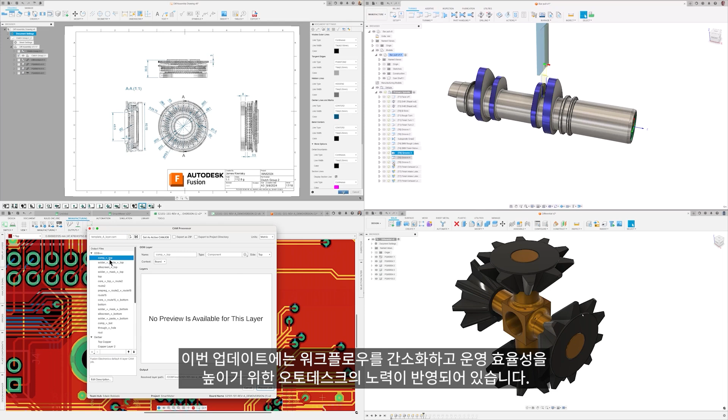Our development team have been hard at work adding new features and functionality to aid in your design and manufacturing and CAM programming for turning processes. These updates reflect our commitment to streamlining workflows and increasing your operational efficiency. Let's start off this release with the manufacturing workspace.

This release brings a lot of value to those who do turning, with many enhancements and new features, as well as additions to geometry selection and additive, with an extremely useful bonus new feature for setups. Let's take a look.

To give you more flexibility and a more consistent experience, we have added another improvement to threading operations on turning toolpath, which is Z-axis confinement boundaries.

Previously, the confinement for a thread was on a per-thread basis and was confined to the stock, which resulted in trial and error to get the desired toolpath outcome.

We have now aligned the turning confinement options for threading with the other turning strategies, which allow you to be more purposeful as to where threading begins and ends.

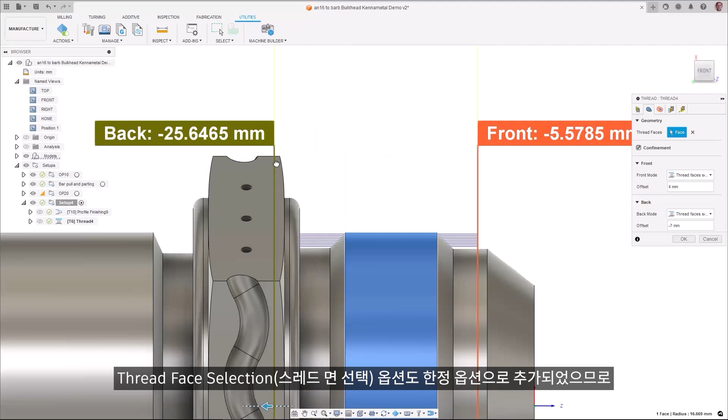Additionally, a thread face selection option was also added as a confinement option to make things simpler in situations where you have multiple threads to machine.

A highly requested improvement to threading operations in turning is the ability to define the depth of the first pass, and it's now available. This increases toolpath flexibility and safety.

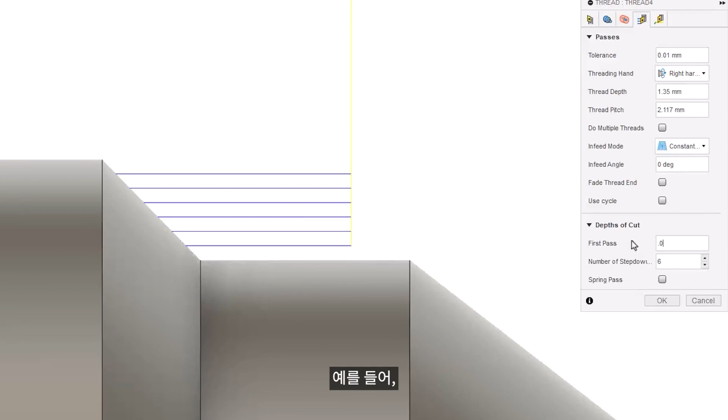For example, when threading harder materials where a larger than desired amount of material being removed on the first pass can damage the tool. An important callout here is that post-processes will need to be modified to populate the relevant Q value inside the threading cycle.

All the posts on the website have been modified to add this functionality, so you will need to use the updated version for the cycle to output correctly.

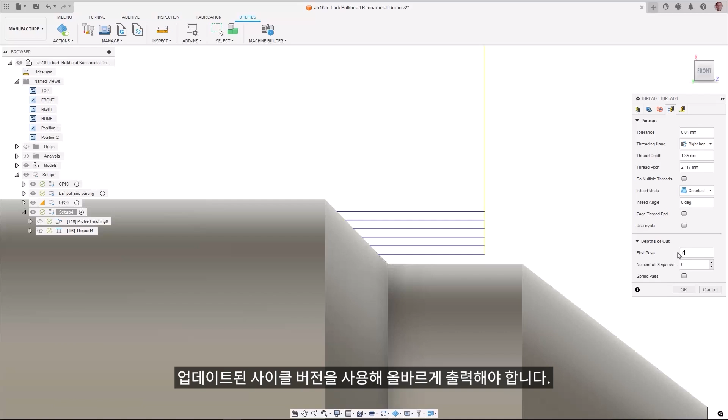If you want to finish profile grooves on the face of a turned part, it can be particularly difficult to understand the correct workflow when only given either the outside or the inside profiling option in the profile finishing strategy.

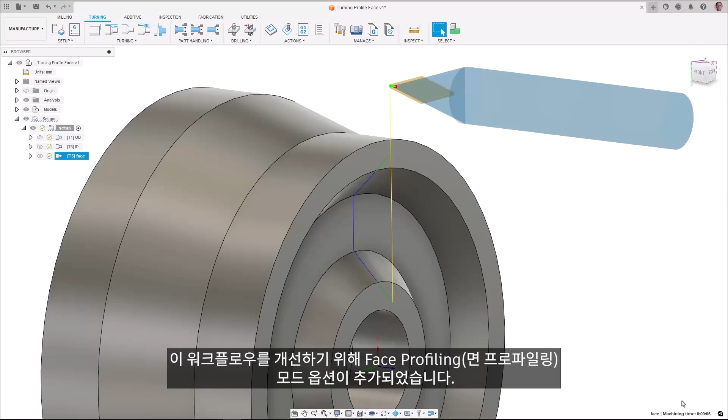To improve this workflow, we have now added the option of a face profiling mode, which creates a clearer workflow for you to ensure that the toolpath retracts correctly with the Z-axis first.

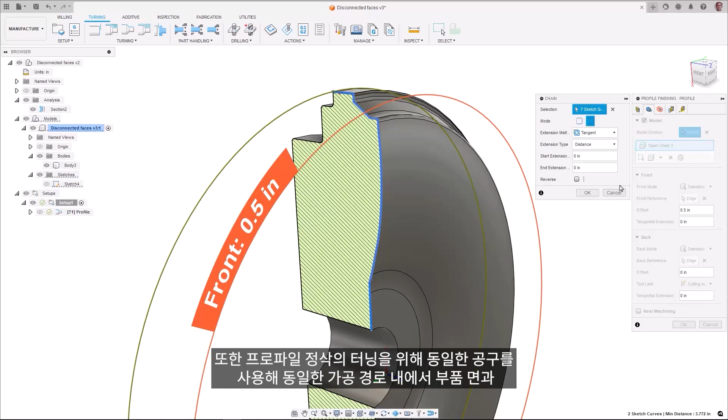Also, for turning in profile finishing, we have added the ability to machine multiple disconnected regions on the ID, OD, and the face of the part within the same toolpath, using the same tool.

This allows you to machine both face grooves on the part as well as features on the OD or ID of the part.

Bar pull functionality has been added in this release, and it's truly a big enhancement for turning. There are many reasons on a turn mill machine as to why you would want to use the sub spindle to pull the bar stock.

Maybe you have a long part that needs to be machined in steps to ensure maximum rigidity and support, or maybe you want to use the sub spindle to pull out the next part length before parting off.

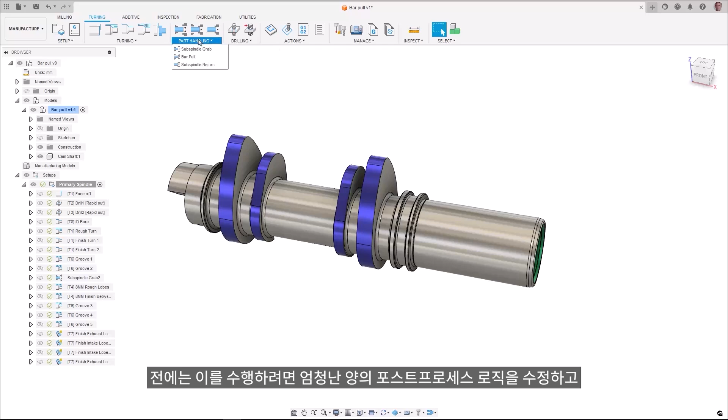In the past, this could only be achieved through a heavily modified amount of post-processor logic and manipulation of the sub-spindle return option.

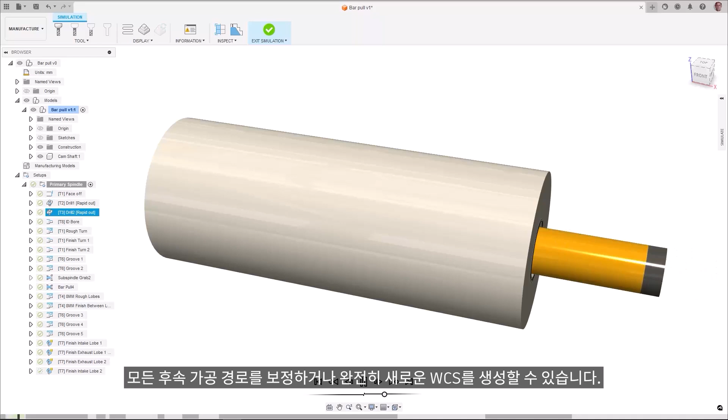You now have a designated bar pull option that enables you to define the pull distance of the part and gives the option to either compensate all subsequent toolpath or create a new WCS entirely. This gives you more clarity through the turn mill workflow, enabling you to program quicker.

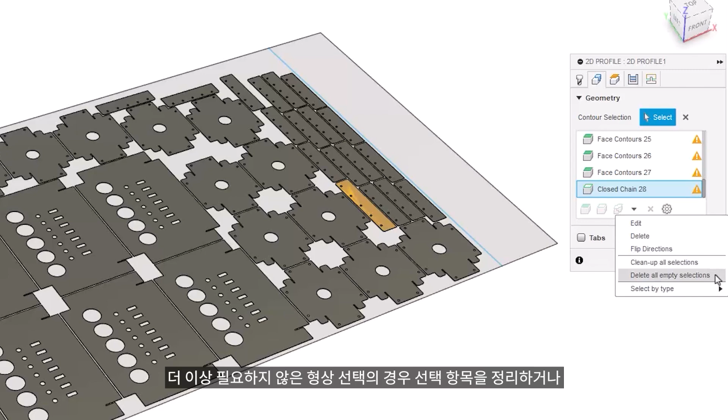Improvements to geometry selection allow you to remove redundant selections and references more quickly and easily. For geometry selections which are no longer required, there are new options to clean up selection or clean up all selections, which will remove empty geometry selections.

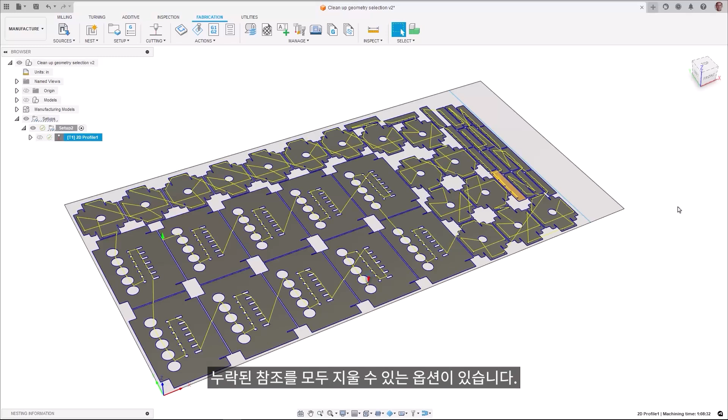For geometry selections which are still required but need rework, for example reusing a chain selection to select a different feature, there are options to clear missing references and clear all missing references.

For those of you who leverage the Wrap toolpath functionality, we have made it substantially easier for you to make pocket selections. Prior to this release, all pockets needed to be selected individually.

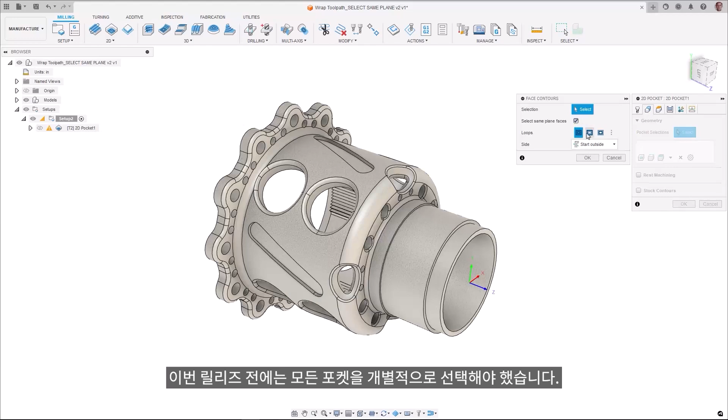Of course, if you had just a couple pockets to select, this wasn't a big issue. However, if you had dozens of pockets, it tended to get rather laborious.

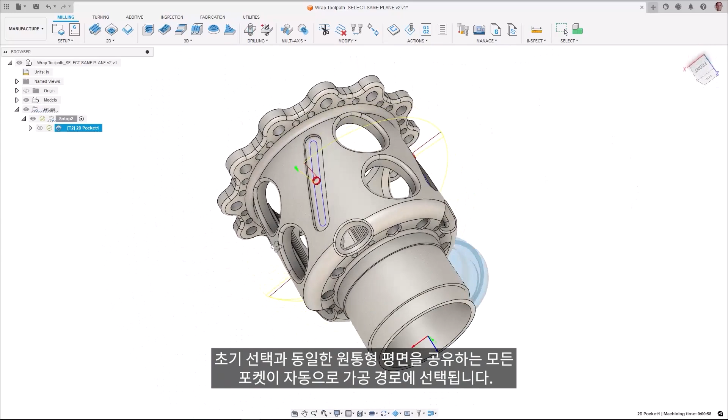We have now introduced the Select Same Plane option for pocket selection. Once you enable this parameter, the toolpath will automatically select all pockets that share the same cylindrical plane with your initial selection.

Have you ever wondered if your part will actually fit in the machine, or wondered if it was positioned correctly so you could machine a feature without exceeding the axis limit? With a new option in the setup, you now can.

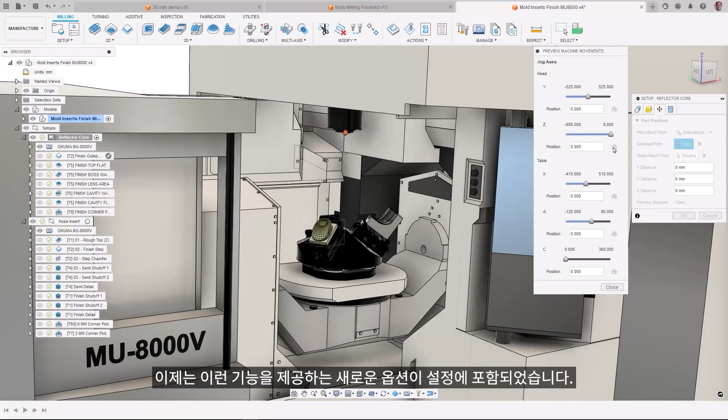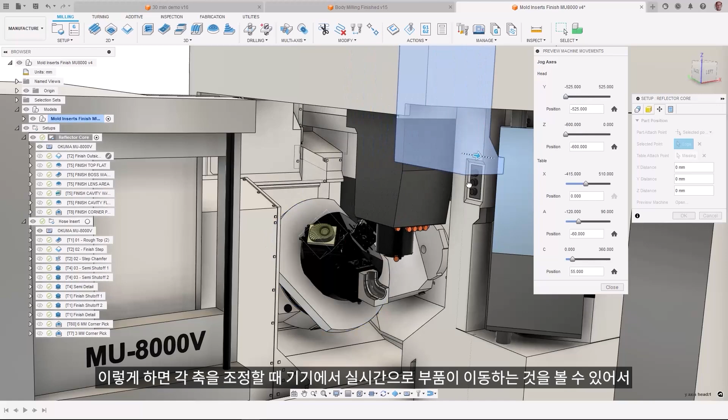In the Part Positioning tab of the setup, there is a new button called Preview Machine. This will open machine jogging and allow you to jog the machine via drag handles or by selecting the bodies themselves. This gives you the benefit of seeing your part move in real time on the machine when you jog each axis.

The Inspect Surface Probing provides the ability to inspect geometry with a user-defined probed path.

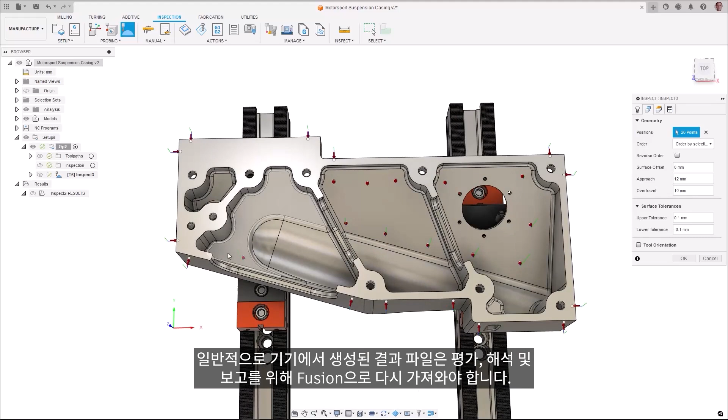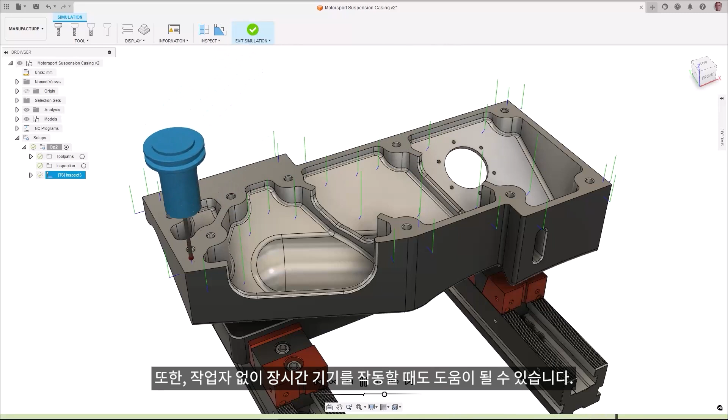The machine-generated result file typically must be imported back into Fusion for evaluation, analysis, and reporting. The new Live Data connection allows the machine-generated results to be sent automatically to Fusion, allowing results to be evaluated and analyzed more quickly, and provides additional capability to stop the machine if a problem is detected. This can also help allow machines to run without operator attention for longer periods.

Along with this release, we've provided machine connectors to support Fanuc, Heidenhain with DCOM, and Siemens with RPC controls. These can be found in Fusion Post-Processor Library for supported inspect and inspection post-processors.

A point connection net option has been added in additive as a new pattern type to bar support base plates for groups of connections. This allows you to generate base plates where every bar is connected to another bar, ensuring stability at the build plate without wasting material.

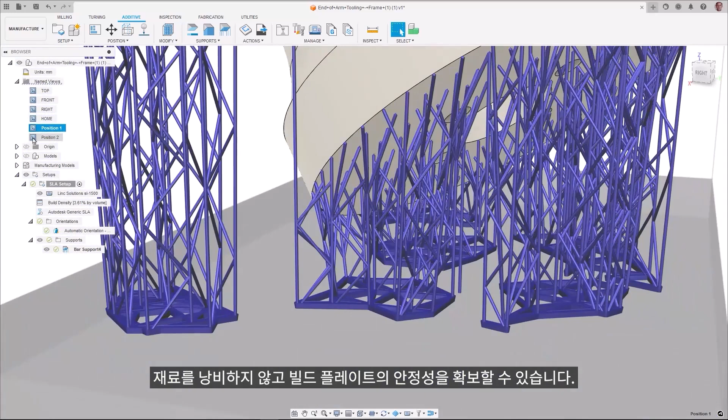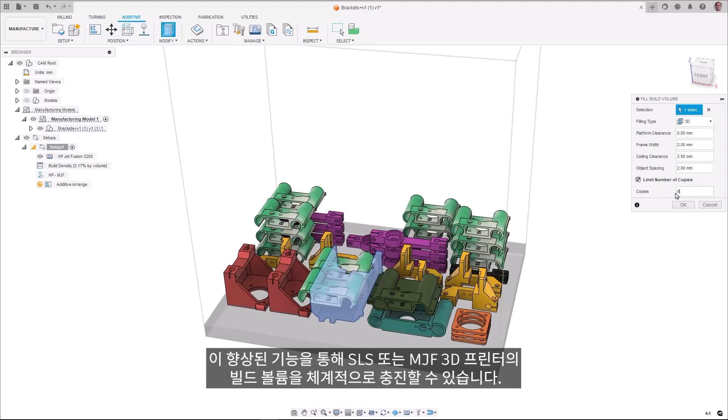When using the Fill Build Volume command, instead of filling the entire empty build volume with a selected component, users now have an option to limit the number of copies that will be created and limit which component actually gets copied. This improvement will also allow users to fill the build volume of an SLS or MJF 3D printer systematically.

I'm thrilled to inform you that Fusion electronic design capabilities continuously improve performance and usability, exceeding expectations. In this update, we're expanding our simulation features, refining library management, and much more.

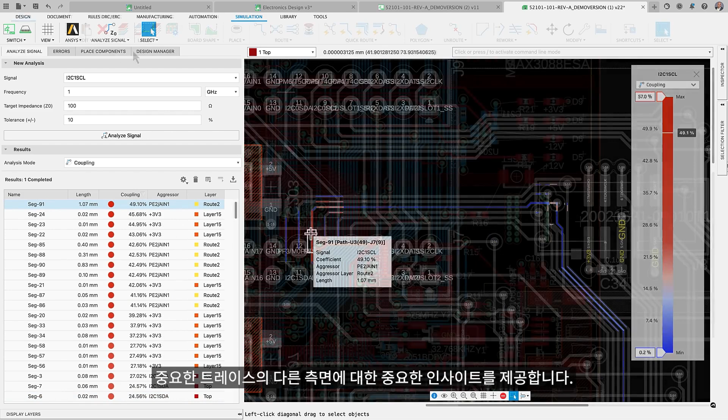Let's get started. Through our ongoing partnership with ANSYS, the signal integrity extension of Autodesk Fusion is continuously enhancing its capabilities. This powerful tool now offers you critical insights into impedance, resistance, inductance, capacitance, and other aspects of your critical traces.

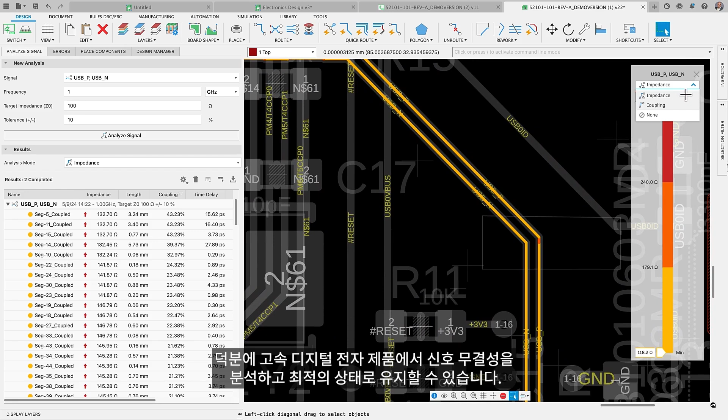Our latest update empowers you to more precisely analyze the coupling effects between traces and nearby aggressors. We have harnessed the ANSYS MOM solver for this update to ensure consistent impedance and coupling analysis on differential pair signals. This means you can analyze and maintain optimal signal integrity in high-speed digital electronics, which is crucial for minimizing performance impacts caused by even the slightest discrepancies.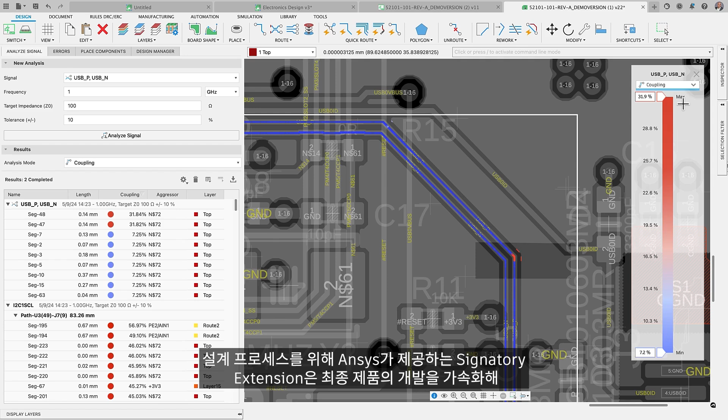Switching to the coupling mode will measure the pair's coupling coefficient against aggressor signals, a critical factor in understanding and mitigating crosstalk effects. Having the signal integrity extension powered by ANSYS as part of your design process accelerates the development of your final product, leading to enhanced outcomes and quicker market entry.

In our electronic workspace, we frequently define groups of assets for efficient design replication. When working with connected assets, typically, signal names are automatically updated. However...

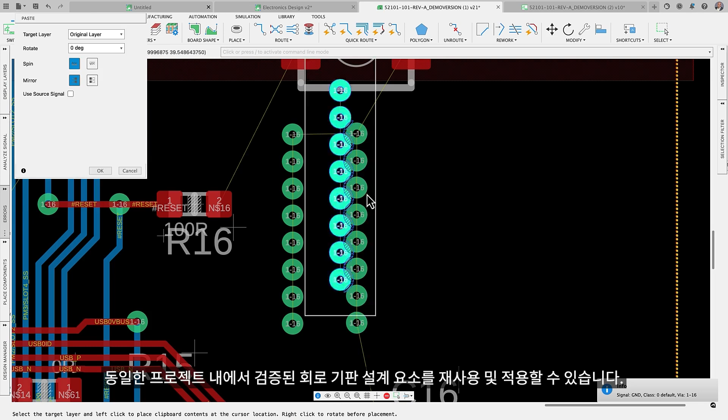With the latest version of Fusion, you now have the flexibility to either preserve the original signal name or opt for sequential signal naming. This enhancement facilitates your design process, allowing you to reuse and apply proven circuit board design elements within the same project.

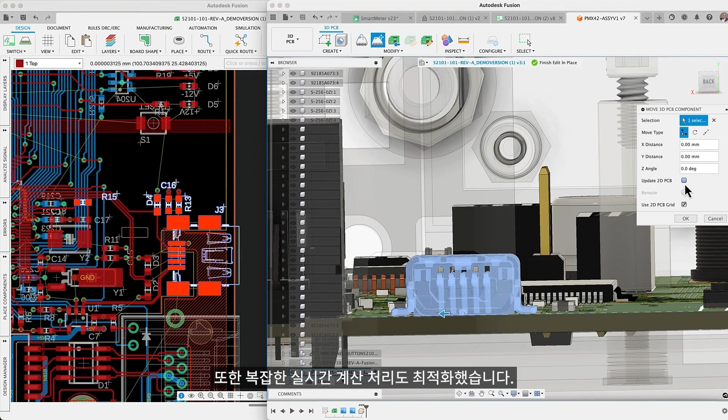We have implemented more Fusion Electronic updates to enhance your design experience. Our latest improvements speed up design loading, especially for designs containing large amounts of polygons. And we also optimize handling of the real-time rat's nest calculations.

Loading circuit boards will also load faster into the CAM processor for a smoother and faster path to manufacturing experts. These enhancements will accelerate your workflow and bring your innovative ideas to life more efficiently.

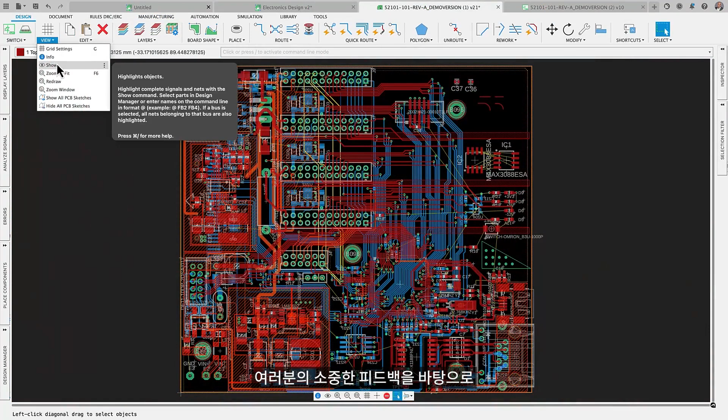We're pleased to inform you that based on your valuable feedback, we've reintroduced the show command and improved component selection with disabled top and bottom layers. Additionally, wires with flat caps are now accurately recognized by polygons for precise shape rendering.

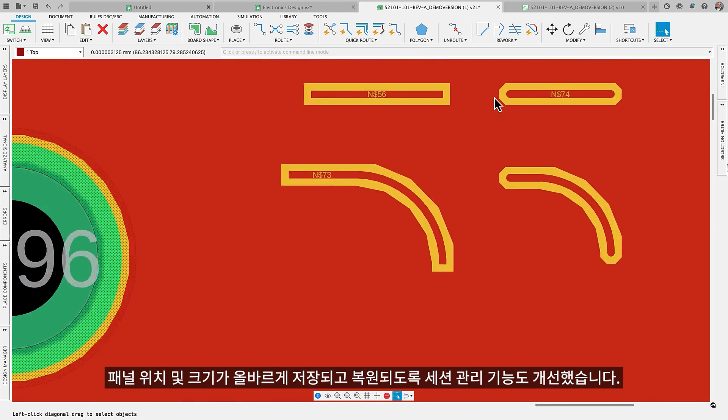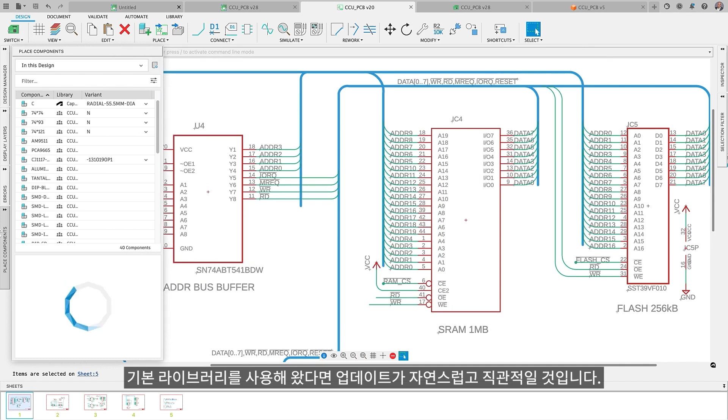We've also enhanced session management, ensuring that panel positions and sizes are correctly saved and restored. A significant change is our transition from local to library.io for Autodesk default libraries, which improves management. We also made it easier to identify our team libraries. If you've used our default libraries, updating is seamless and quite intuitive.

These updates will enhance your design experience and pave the way for future advancements. By streamlining the development process, they help accelerate your product market entry and reduce the need of multiple prototypes, saving you time and resources.

To start off the design space, we're introducing Ground to Parent to make your assembly workflows a whole lot smoother. It automatically grounds the component you create or add to the document, fixing the age-old issue where a component wouldn't ground immediately if it was placed first.

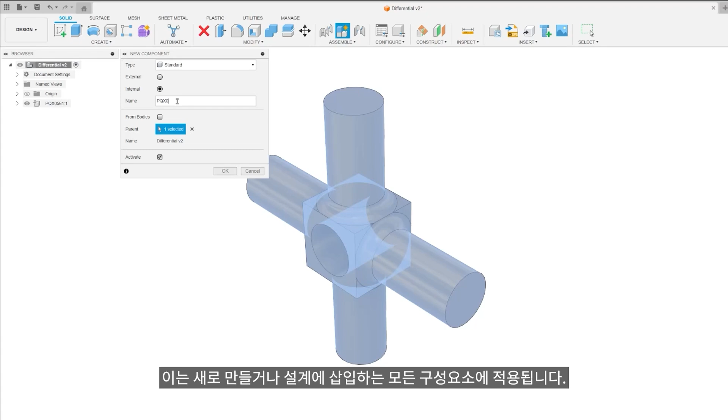By default, the first component, whether it's under the root or another component, gets grounded to parent. And this works for all components, whether they're created new or inserted into your design.

Here's a key point though: Ground to Parent isn't tied to the timeline. This means even if you move components around in the timeline, they'll stay grounded to where they were first inserted.

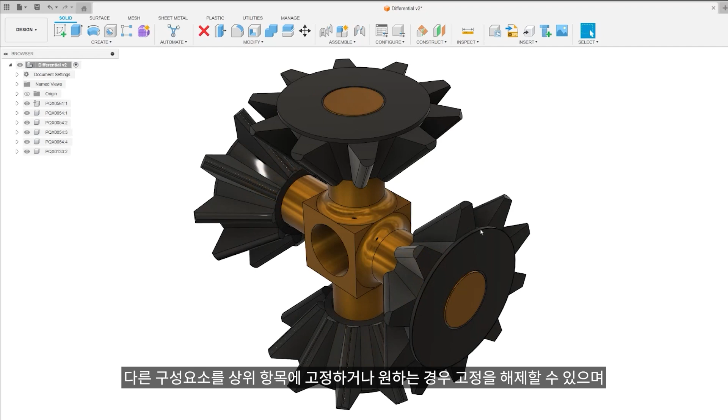But hey, you're still in control. You can choose to ground other components to the parent or even unground them if you want, all done through the browser. And just a heads up, we've renamed the original ground to a new name, Pin.

Solid Sweep is a game changer for creating complex geometries in a snap. Rather than using a sketch profile, you can now create a sweep using a solid body. You can create either a 2D or a 3D sketch to act as the path, and then select any body to sweep along the path.

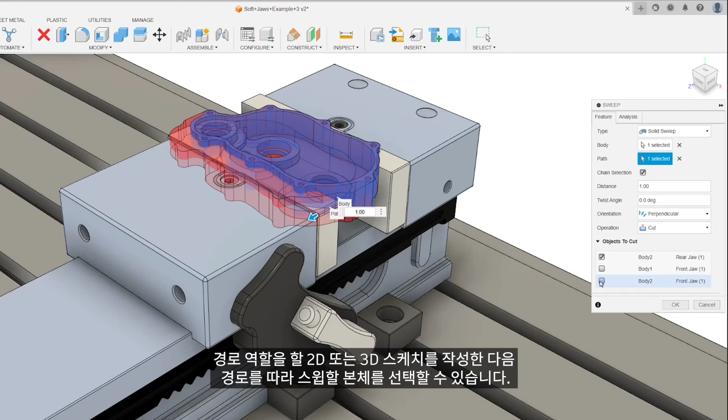New features like Solid Sweep are all about empowering you to innovate faster by allowing you to create complex designs more efficiently.

There is a new shell type in Fusion that introduces a robust and fast algorithm that creates rounded geometries instead of sharp edges. It also provides a partial success option when the geometry gets too complex, leaving you with surface bodies that you can manually patch.

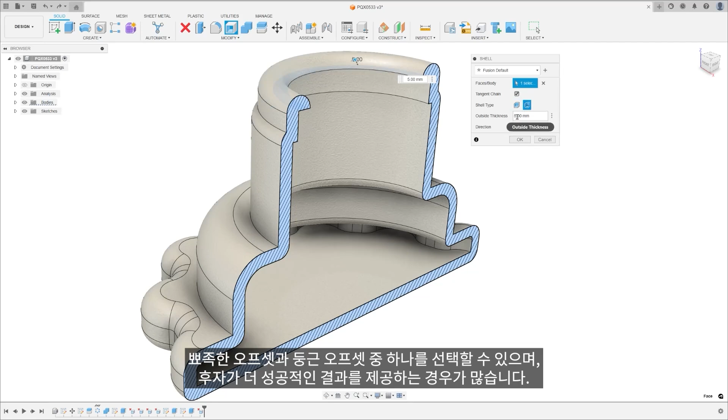You can choose between sharp or round offsets, with the latter often bringing more successful outcomes. If a shell fails, you'll get a suggestion to try a different type. This feature aims to reduce reworking outcomes to help boost your creativity.

The multi-hole patch tool lets you apply multiple patches at once to a single surface, all in one go. Not only does this save you a bunch of time, it also keeps your timeline neat and tidy. Before this, applying multiple surface patches to the same surface would require you to have separate operations, which could create

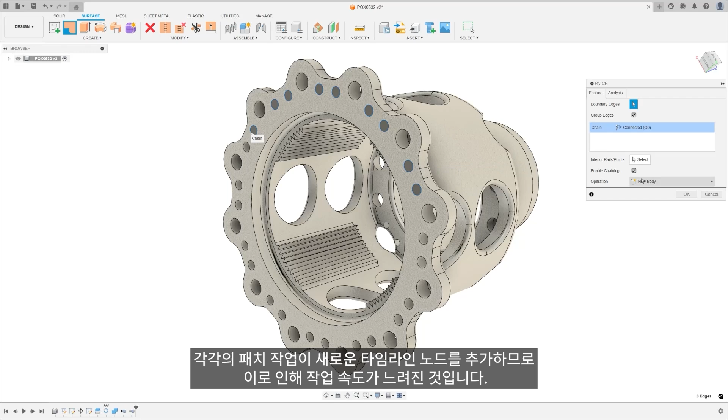quite a bit of timeline clutter, especially for faces with lots of holes. Each patch operation added a new timeline node, which could really slow things down.

Let's talk about measuring joint origins. This handy addition makes joint origin selectable when using Measure, which can be a real asset in various assembly workflows.

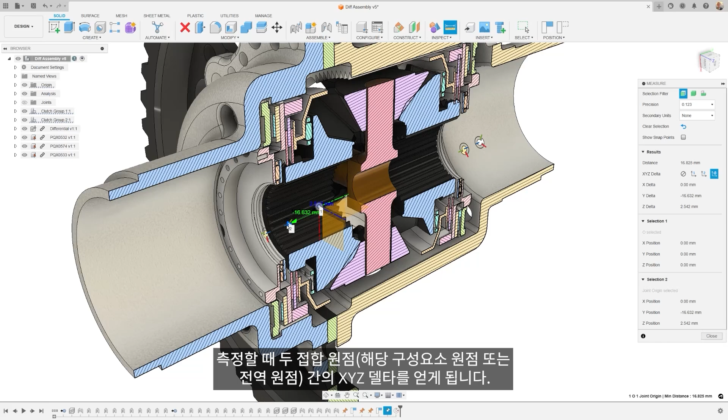In essence, joint origins are now treated the same way as points were previously. You can measure from one joint origin to another, or from a joint origin to any other measurable object. When measuring, you get the XYZ delta between two joint origins, either their component origins or the global origin.

Read-only configurations, this is a game changer. Before this, consumption of read-only configuration data was blocked, which could cause issues with insert, derives, drawing creation, or get latest. But now, you can share read-only configurable data downstream or with consumption-only datasets.

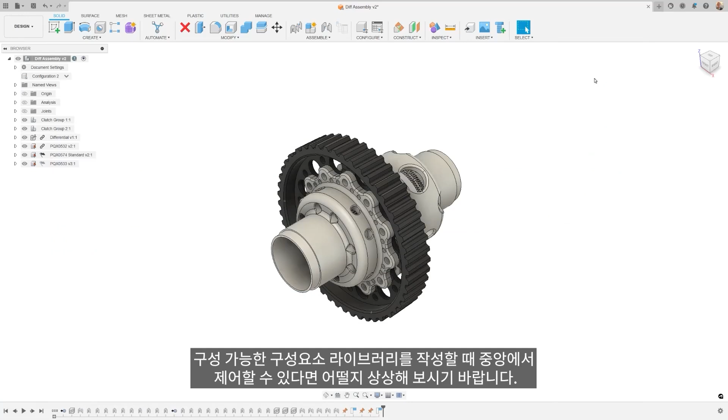Think of creating configurable component libraries with centralized control. It simplifies linking data up and downstream while maintaining a single source of truth. If you make a change somewhere, it's reflected everywhere. Also, it's fully integrated with Manage Extension, allowing for component filtering, creating change orders, and more.

Dropping down a dimension, let's take a look at Drawings Workspace. We've got 3 updates to walk through here.

First, the Section View Full Line feature enhances your viewing options. This tool allows you to optionally create a section line that spans all points of your design, providing a more comprehensive view of your work.

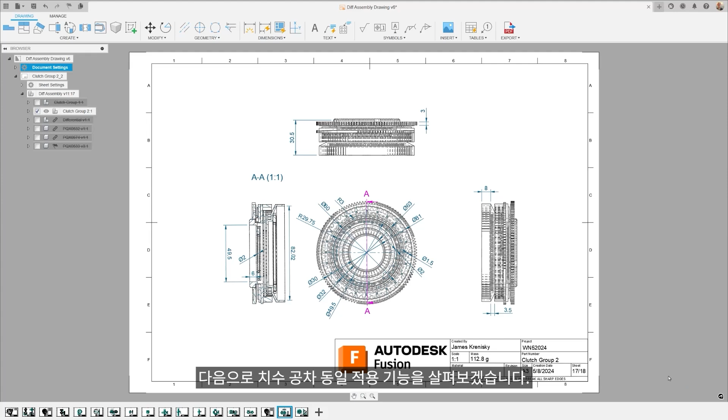Next, we have the Match Dimension feature. This is a time saver for those repetitive tasks where you need to copy tolerance, precision, and alternative units from a dimension to another. With just a click on a similar dimension type, you can apply the same tolerancing.

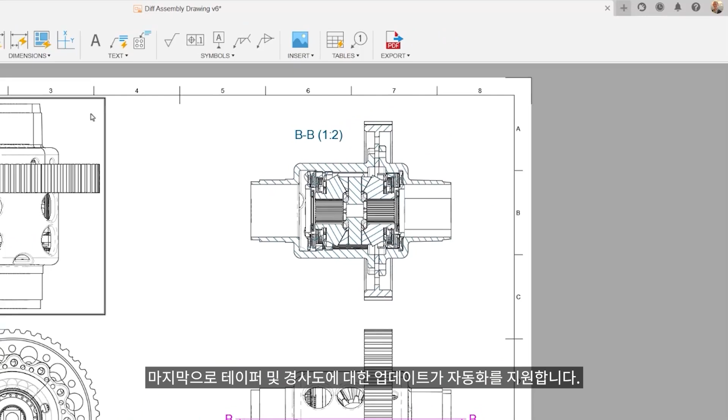Lastly, an update to Taper and Slope, which is all about automating. It automatically selects the correct symbol and calculates a value when adding a taper and slope symbol to your drawings. The value can be easily adjusted using the 3-dot option next to the dialog.